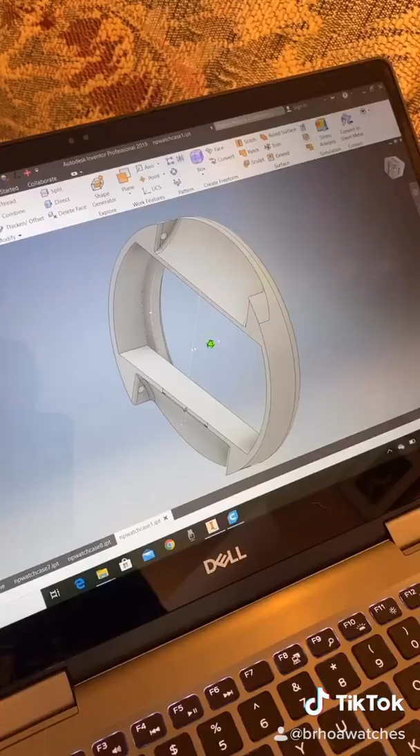I really want to make a watch brand called BRHOA, B-R-H-O-A. So here's the 3D model of my first prototype. There will be no prongs on the case.

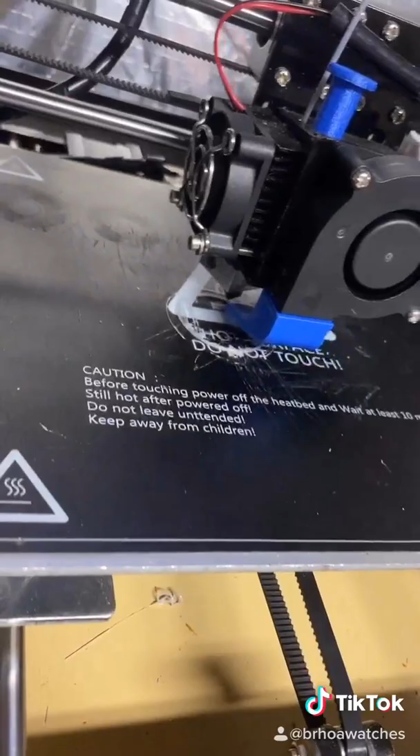I started printing my first prototype, and then I had to take a break while it's printing and eat some lunch. Once it was finished, I had to test it. I got it off the printer, and I had a nylon watch band, and I tried shoving it through, but the opening was too small, so I have to make a new prototype.

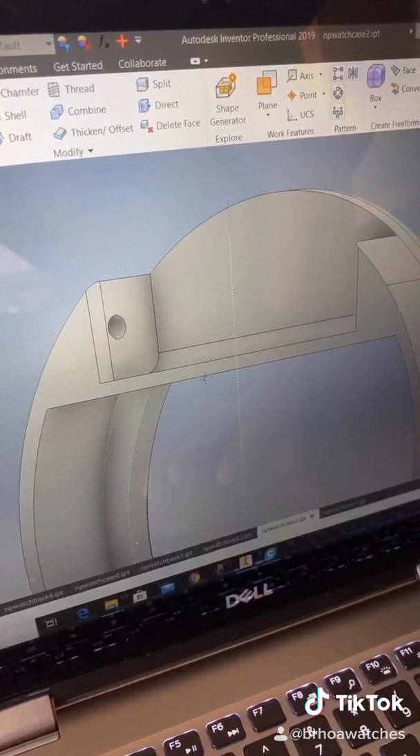So I went back to my computer and freed up some space around where the band goes, and there's the second prototype. I printed that out. As you can see, the band fits through the bar. It's a little tight, but it still works.

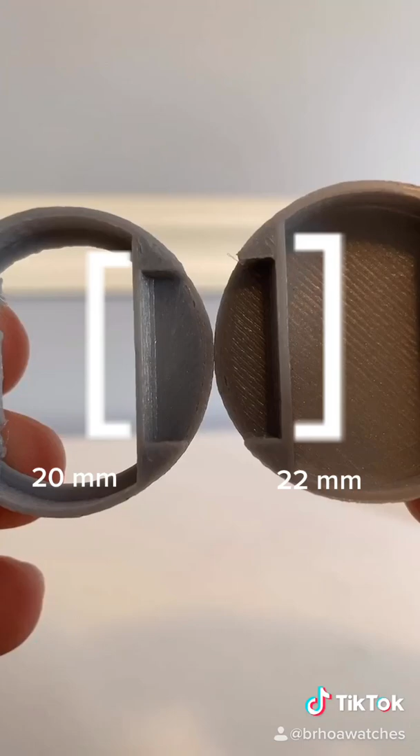In my next prototype, I'm just going to adjust the opening so that it's a little bit wider. You can see it there, it's a tiny bit of a wider gap. I also filled in the part where the face goes just so it looks a little nicer, then put the band through and put that on my wrist just to see how it looks. I think it looks great.

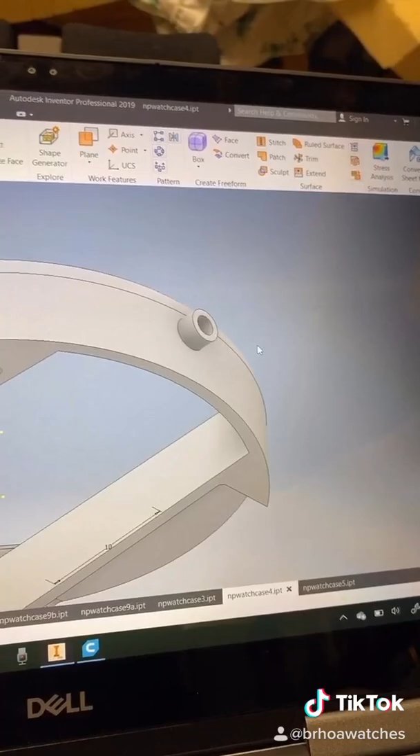In my next prototype, I need to make a hole for the stem of the movement to go through. So I changed it up a little bit in my 3D model, downloaded it as an STL, and printed it out. Here's the result, looks pretty good.

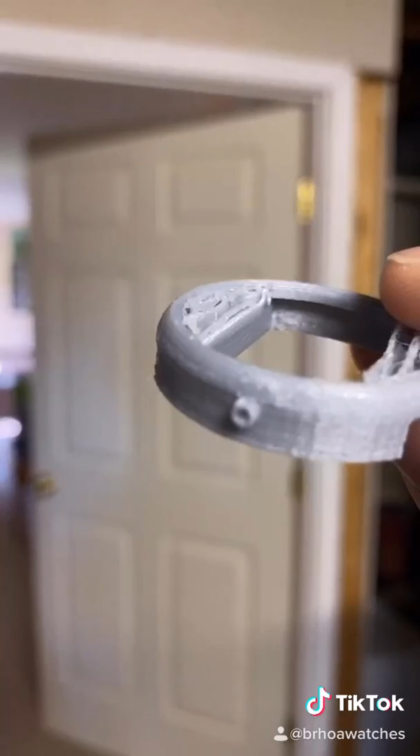Time to test it out. The stem of the movement fits through the hole, so that's good. The only thing is that the movement doesn't really fit in the case, so that's what I gotta fix.

So I had to get on my computer and try to make a little more space in there. I managed to get 19 millimeters of space, and then I printed that thing out. Yes, it slides through, the movement fits in the case. That's exactly what we want.

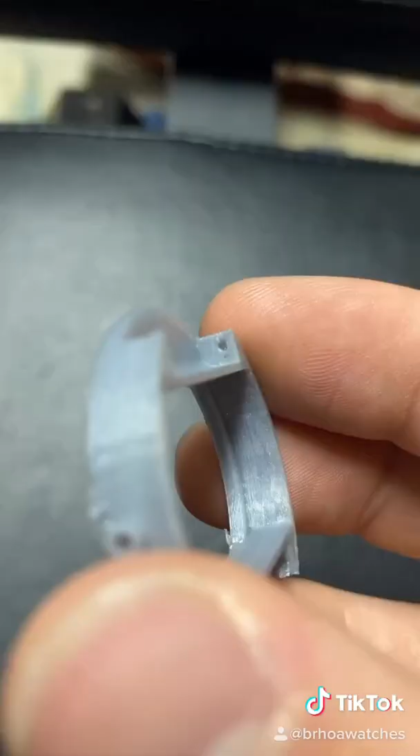But I started to think that this spot right here is too thin. I want to make it a little more sturdy so it doesn't break, but I still have to make sure the band will fit through that opening easily. So I went to my computer and made it a little bit thicker, hopefully that'll help it out. There's also more space between the hole and the wall so that the band will go through nicely.

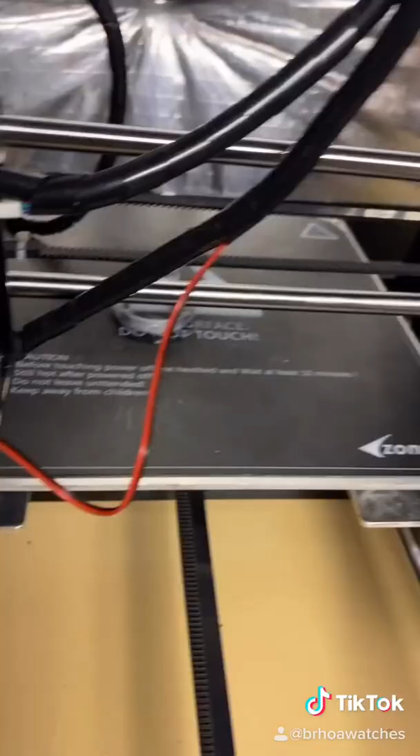I printed that out, and look at what we got here. It printed nicely. I want to slide the band through it to make sure there's enough room, and here it is going through, and it fits nicely. I wanted to move on, but I just had to add a little bit more room, and I also made it a little stronger too.

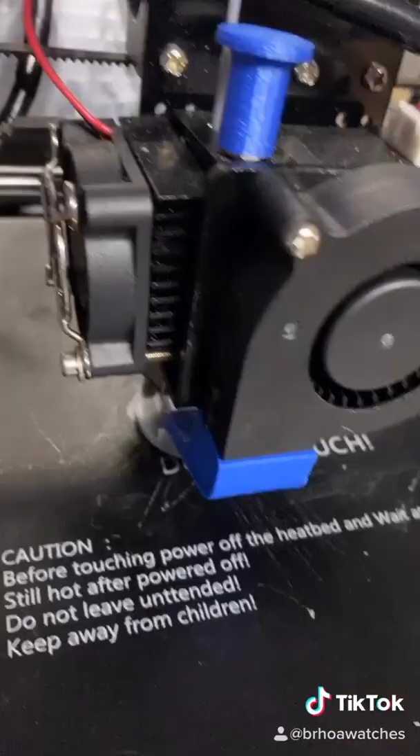So now we got 19.5 millimeters of space. Printing it out and testing the fit, it looks a lot better. We have plenty of room this time, and it's also very sturdy on the edges there. Putting the band through the bars again just to test to make sure it fits, and it does. Still looks very good.

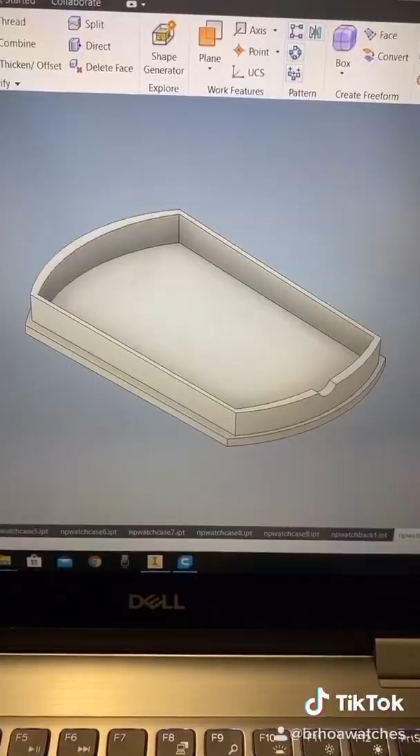All I need now is to make the back. Hopefully I can get it to fit on the first try. Here's my 3D model I made, it's very simple, not too difficult. Getting ready to print, got my handy dandy printer right here.

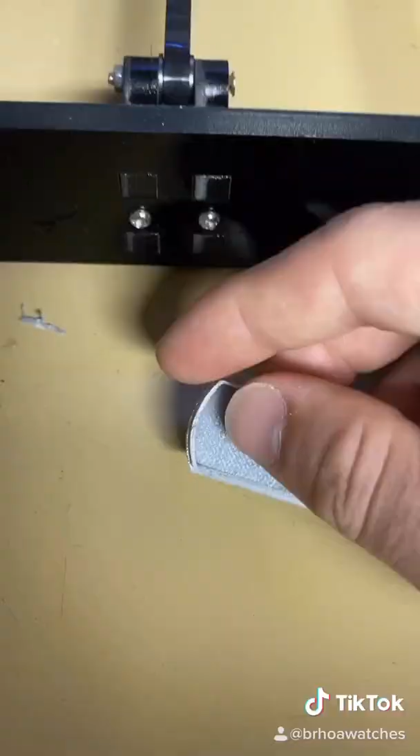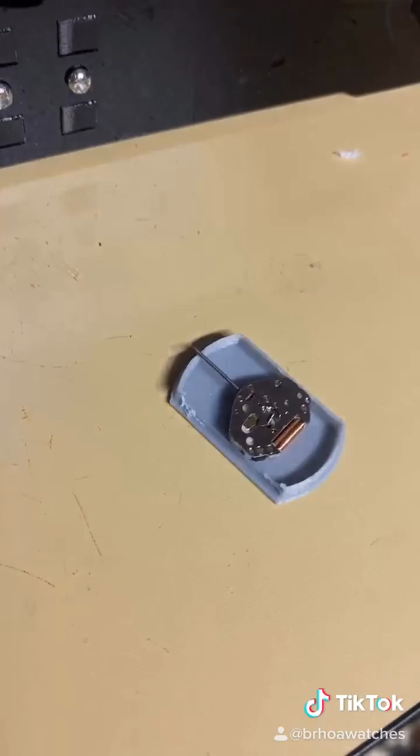Not exactly what we wanted to see. It didn't print very good because of how thin I had to make some of it, since I needed the movement to fit inside of it. However, it did fit into the back of the case, so that's good. But here you can see that the movement really doesn't fit inside of it, so that's not gonna work. I'm gonna have to adjust something about my watch so that the movement can fit.

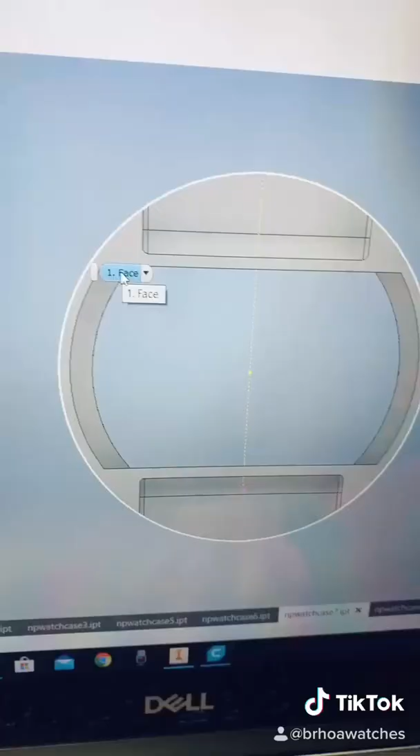I made the back for the case, and it fit, but there's not enough room for the movement. I simply can't make parts of it thin enough to fit the movement and also fit inside the case. So I had to make the decision to up the diameter of my watch by 2 millimeters. I started off with a 36 millimeter diameter, and now I'm changing it to 38 millimeter. I wanted to keep it really small, but 38 is still good. Here's the exact same piece, just 2 millimeters bigger, just as good as all the other prototypes I've made. And here it is with the band.

There's going to be a lot more room to work with here, so this may actually help me. Now I just have to make a new back for this case. Since we made the diameter of our watch 2 millimeters bigger, we can get rid of the last backing and make a new one.

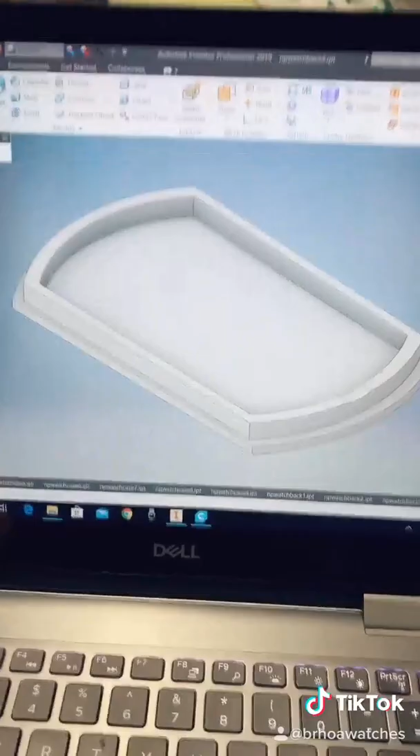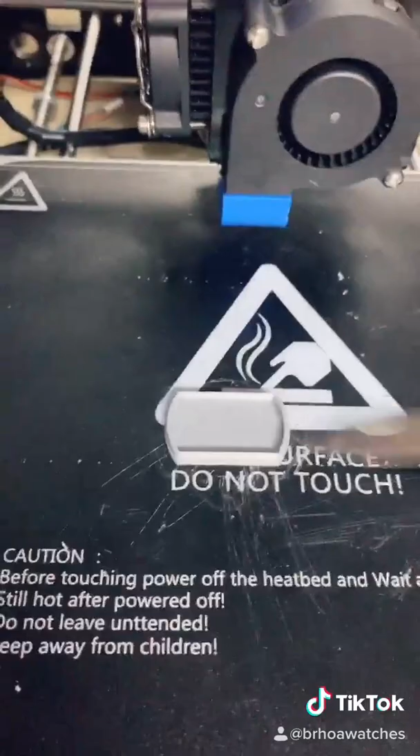We can print this baby out, and hopefully it will fit very nicely. I think it will. It can also be pretty fun to get the prints off of the surface. And there we go. Now I'm gonna put the back onto the case, and it snaps perfectly. It's a great fit. There's plenty of room for the movement to fit inside, and this is a little taste of what it's gonna look like.

I'll probably adjust it at the corners there just so it looks a little bit better. So far, I've pretty much finished the whole case and the back. Now all I have to do is make the back look a little bit better so that it fits nicer with the case. So I'm just going to make a little adjustment and get a new piece, put that on the case, and it looks really good now.

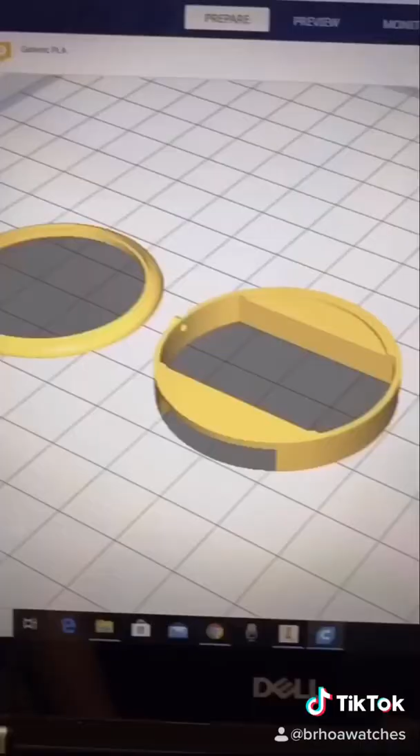The next thing I did was split my case up into 2 pieces so that I could print it. I did this so I would be able to test how my dial fits on my case. So then all I had to do was print it out, then I could have some fun getting it off the surface. You can see right here how the 2 pieces fit together. Looks pretty simple. So now it's time just to glue them together.

I used some pretty strong glue to do that. Then it was time for an amazing egg sandwich while it was drying.

And here is the finished product. It looks much better, way cleaner. Now I'll be able to print a test dial so that I can put that on the case and see how it works. Now it's time to figure out how to incorporate the dial into the case.

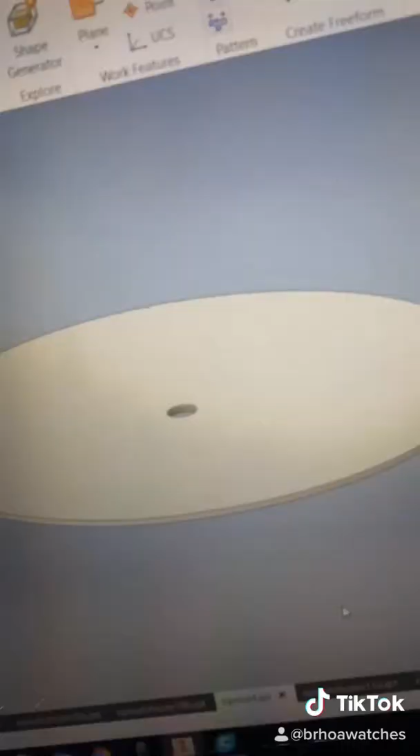So I printed out a very simple disc right here. All I need to do is test it out and see how it fits in my case. This is what it looks like. Of course I had to draw on it to make it look cooler.

And then I tried putting it in the case just to see how it worked. And it fit in the case, which is good, and the movement also fit in the back. But it's still not going to work because there's nothing keeping the dial from being pushed out through the back. So I'm going to have to change something about my design to keep the dial from coming out.

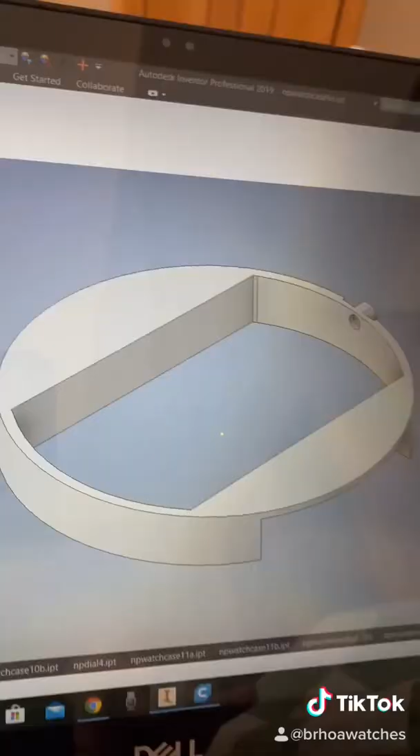I need to work on the dial. And since it doesn't stay in the case, I need to redesign my case. So all I did was add a little bit of a notch to the bottom half of my case. The dial should be able to fit securely in here. So I printed all that out, and here's my new piece with the notch cut out.

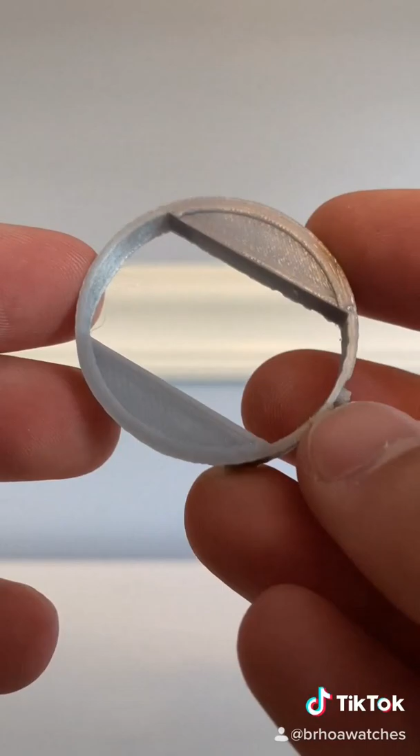Looking good. And here is the top half of the case. It's pretty much the same. And then here's the dial. Now I just have to put it together. So the dial gets sandwiched between the 2 pieces of the case, and they're glued together.

And this is what it'll look like with the dial securely in place. It's in there pretty good. I also printed a dial out in white so it looks even cooler now. And then I made sure my movement fit in there, and it does. It's a very snug fit. And now my watch is looking pretty cool.

Still have a lot more designing to do. Next, I need to design the movement holder. Right now, I need to design something that will keep this movement in place. This is how it fits in the case right now.

So I went to my computer and I made a bunch of different models. I kept fixing them and adjusting them and kept printing them out until I got everything right. So now it was time to print this one out and see how it works. So this is it. Looks very good. We're going to see how good it works.

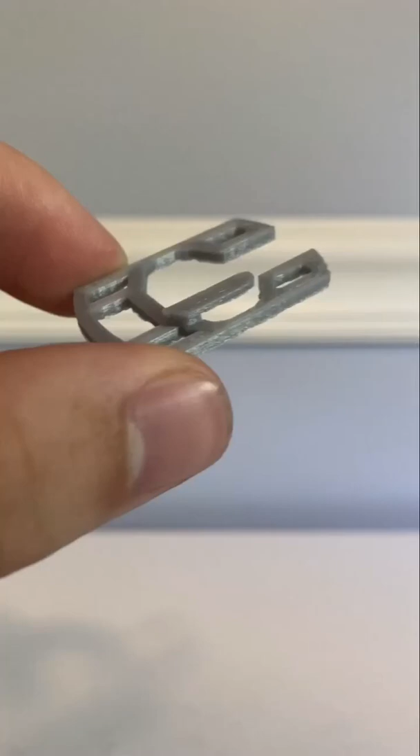And look at that. It fits perfectly. Holds the movement right in there. It's not going anywhere. Now I can just put the backing on, put the band in, and I was also able to put one of the watch hands on just to see how it worked. And it looks like it works. I still have to figure out how to put the hour hand on.